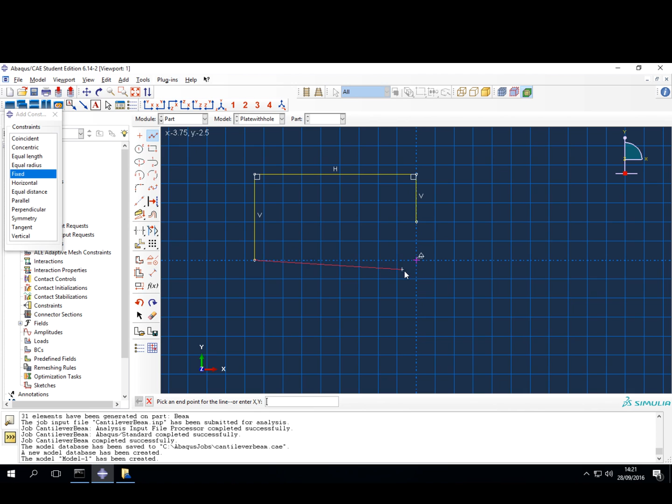I will make a fixed point at the center because I have a radius that I need to form with a curve. So it's always easy for me to work with a fixed point at 0, 0. Then I can go about making random edges, and I can end it with a curve where I can check different kinds of possibilities. So here is one which says I can pick a center point and I can pick two endpoints. So the part is created, apart from the fact, of course, that I don't have dimensions to it.

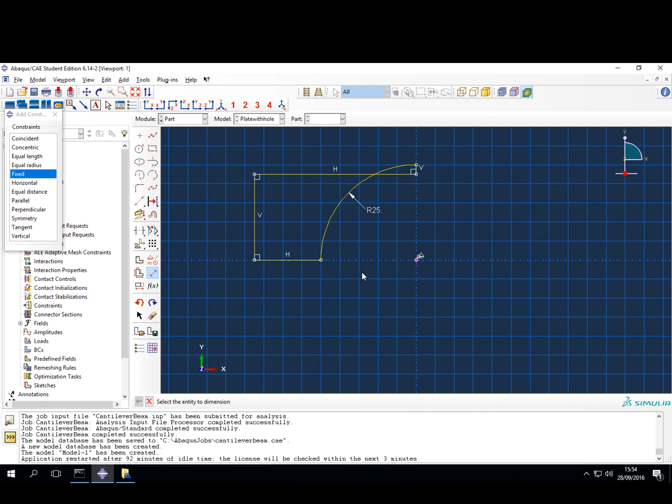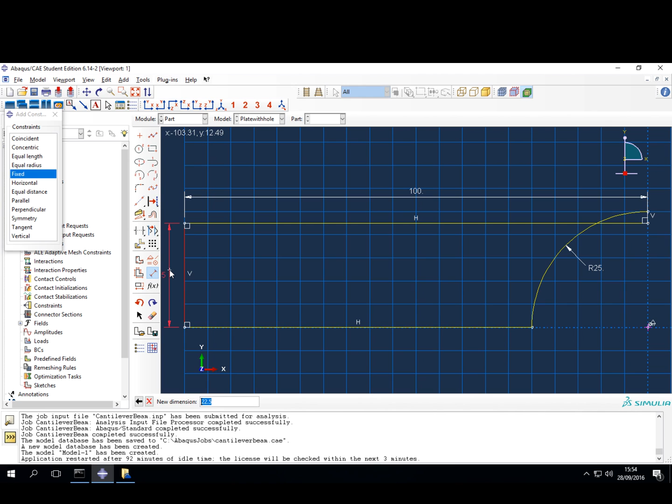So now I can say I want to add a dimension of the radius, and the radius is actually 25 and not 10. So we see this strange thing happening. Then we want to also change the dimension of the other part. So let me zoom out a little bit. And the dimension of this section is 100 instead of 42. And the dimension of this one is 75. So we see it getting better now, but it's sort of shifted to the bottom.

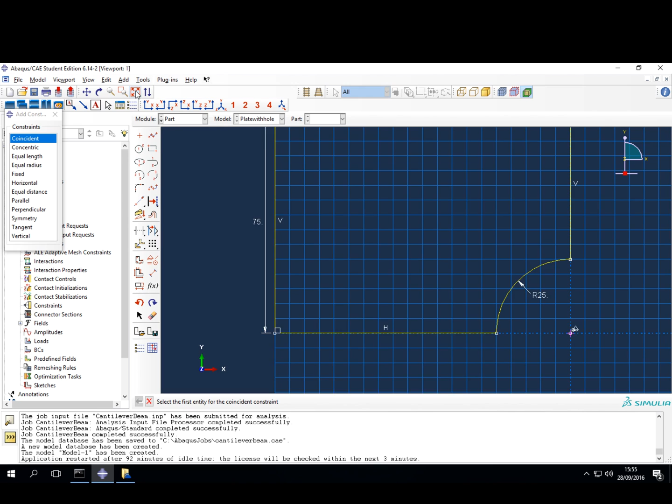So we have to make sure that this line is coinciding with this. So we can do coincident, first entity and second entity. So it puts it in the right place. And our geometry is created. So now with that being done, we come back out to the part.

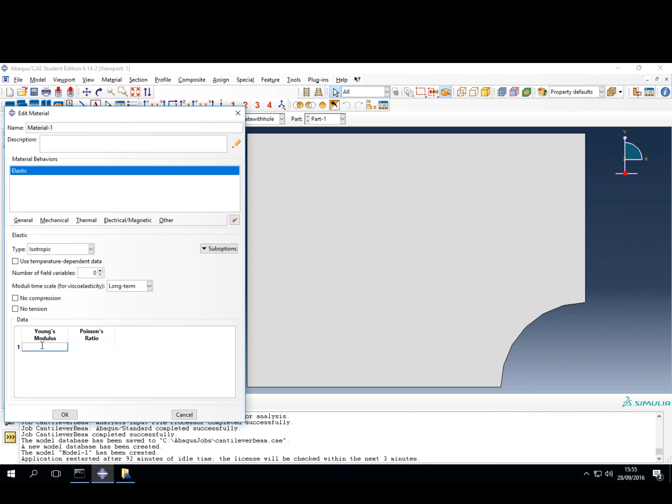Now, because my main goal to teach you is more to do with meshing than with anything else, I'll just very quickly create the material properties without giving much explanation or changing names, because it's just a matter of using certain numbers, and these things we will do again in the future. So I'm not so worried about what kind of structure I want to make out of it. Just want to use a certain thickness. Let me take 2 millimeters here.

And here I can do a section assignment to this section to have one property. But like I had mentioned before, sometimes there are certain properties that don't go with planar sections. The fact that we used a homogeneous shell does not work with 2D planar sections at all. That means we need to create a new section. So I'm going to delete this one and make sure that this time the section that I create is actually the one I need.

Because it's just a planar section, I can use a solid property and apply a certain material to it, which is done automatically, and under section assignments I can have section 1 applied to a shell of thickness 2 millimeters. I will explain this later when we come to shells, but it is more important now to do the meshing. Now let's go to the meshing section.

Now you see that this structure is not uniform. If there was no hole in it, then we could just make rectangular elements everywhere uniformly and it would be a perfectly uniform mesh. But in this case we can't do that, so we need to make some adjustments. But in general, you can also just do an automatic meshing. I'm not going to select anything, no mesh seeds, nothing. I can just say I want to mesh the part and say yes. And Abaqus does some kind of meshing on its own.

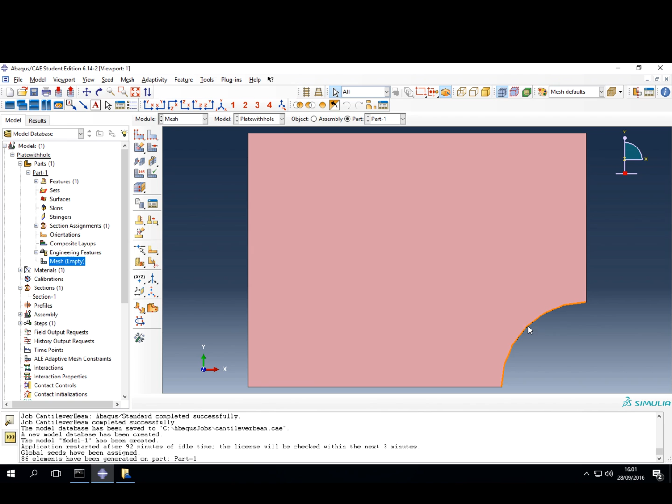So I need to create a partition from this point right up to the center of this arc. To do that, I'm going to go back to the part section and create a partition on this face. I could make a partition using the shortest path between 2 points, or I can use a datum plane. I can also partition using a sketch, and the sketch is the easiest one, so I'll use a sketch.

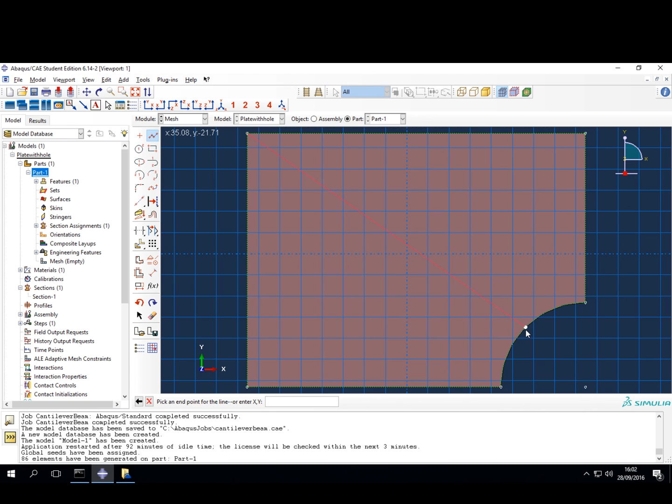I'll just make a certain length here. I know that I want to go to the middle of this edge. That looks right, now I have the center of the edge, that's my partition, I say okay, and it makes a partition. I can use the query button to check the length of each of the sides, so I know it is actually the center: the distance here is 19.134 and the distance here is 19.134 along the arc, so that seems okay. Now I have 2 parts which have 4 edges each: 1, 2, 3, 4.

So I'll go about putting mesh seeds on each one. I will make sure that I have the same number of elements here and here and here. So I'll pick up this edge, this one and this one, and I will put a certain number without using any bias. I want to use the number of elements, not the size of the elements, and I want to use 20 elements on each. So I see a mesh seed applied on it.

In the same way, I will pick opposite edges like this, and I'll also pick 20 here, just because I want to show you some representation. It's going to be a nice fine mesh. Then I mesh the part, and it still does not manage to make a totally uniform section. The reason is that these parts are quite long and stretched out, right? They're not really uniform rectangles, so it's quite large.

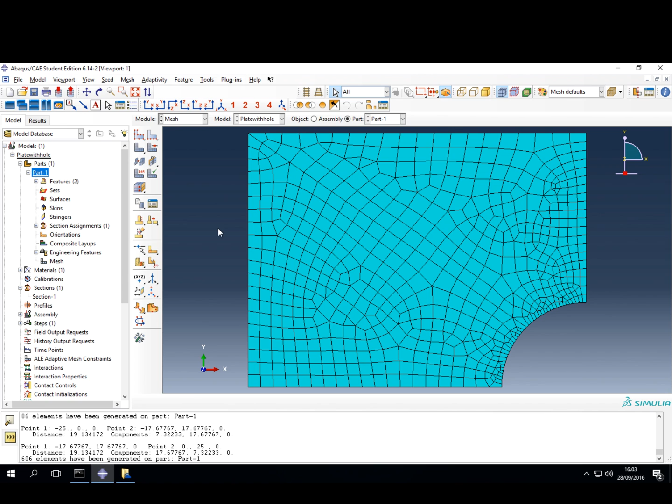So what you have to think about is how to reduce the size so that they are more or less rectangular sections. And there are different ways of doing it. So again, I'm going to remove the mesh. Please don't get me wrong, you can also work with the mesh that was just created. It's just that it's not elegant enough and not good enough. If you want better meshes, you have to go for better designs, like better mesh surfaces.